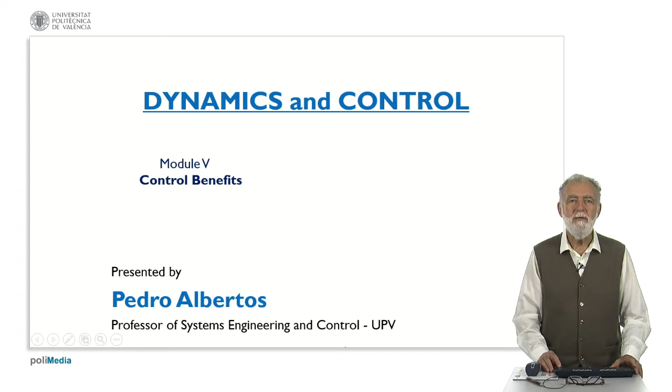My name is Pedro Albertos from the Polytechnical University of Valencia in Spain, and the subject of our session today will be about the control benefits. In particular, we are going to deal with performance improvements.

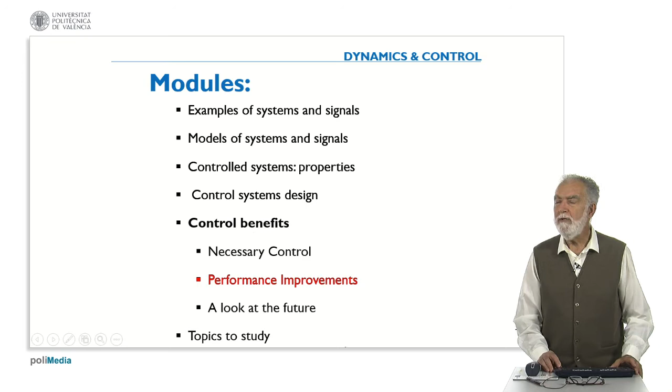You remember the modules. We are in the fifth module, control benefits. Last session we were dealing with necessary control, when the control is necessary, and today we are going to deal with the improvement of performance. Then we have used the control, as we saw before, dealing with unstable plants and also to access processes which are not locally accessible, to remote processes.

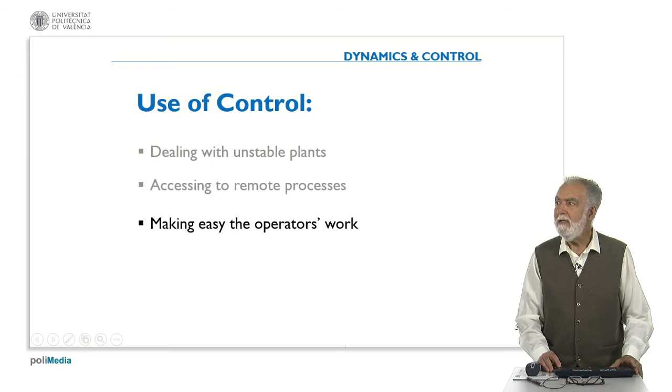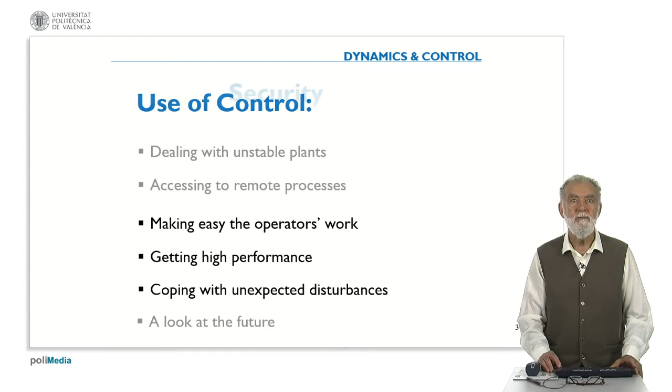And today we are going to use the control to make easy the operator's work, to get better performance, and also to cope with unexpected disturbances. And in the next session we will have a look at the future. So let's start with the security.

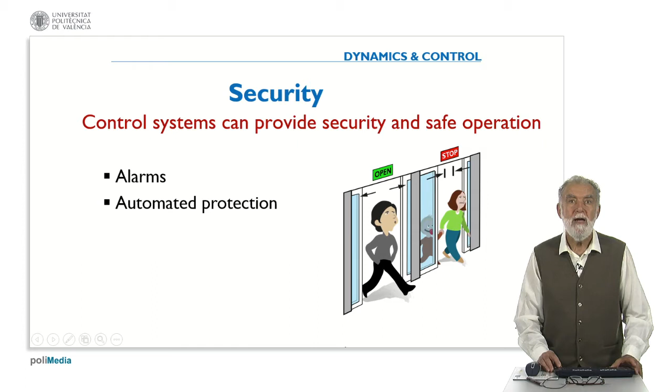We know that the control can provide security and safe operations. Remember the cartoon we have at the beginning, and there is a girl trying to go through the door. Then the control will detect that there is a person coming through and will keep the doors open. So we can use control in a very general way to deal with alarms and to provide security and safe operation of many processes. But it also provides the facility to make simple actions in harsh environments.

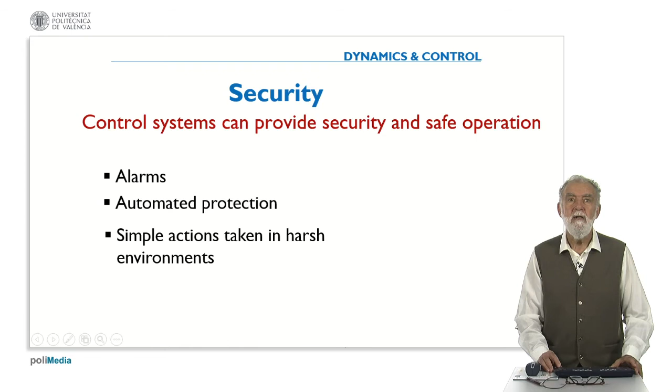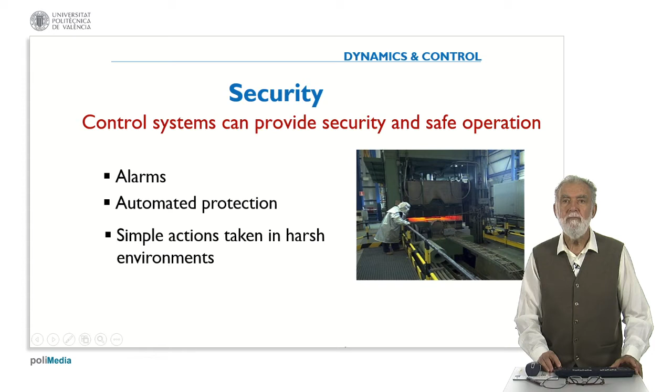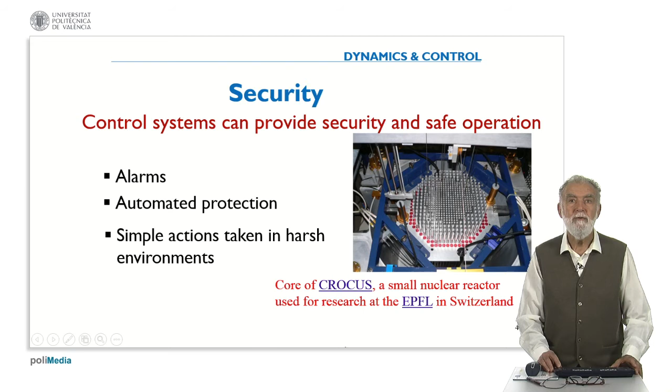For instance, if you consider here a steel making factory, the temperature is very high, the humidity also, and there is a lot of pollution, then any action taken here can be done remotely, and then control will enhance the security of the operators. Moreover, if you consider a nuclear reactor or any operation which is dangerous, any simple action can be done remotely by control, providing the facilities to change, to adapt, to modify the working conditions without the need of the operators to enter in this environment which is not very safe.

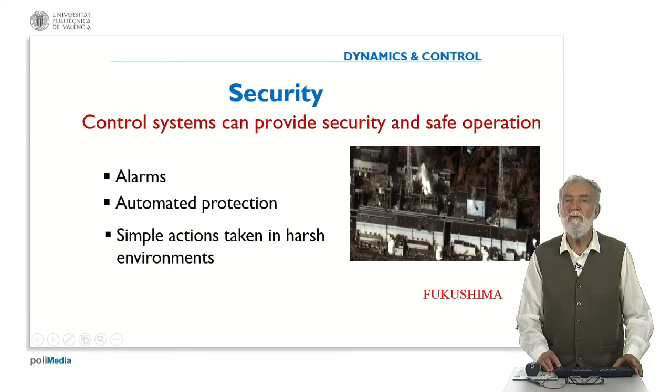Well, control can do many things, but of course cannot avoid disasters like the one we saw in Fukushima. In that case, this was not a problem of control, it was a problem of the breakdown of the power plant, and control is prepared to cope with some disturbances which are in principle already foreseen or taken in consideration when you design the control, but not for any kind of disturbances.

We can use the control also for commodity, for quality of life. Remember in domotics we had this house of the future, and we came from a central control to control the lights, the security, the alarms, the opening and closing of the windows, the heating, or even the irrigation. And this can be done locally in the central control or remotely by the phone. And even if you don't know, there are many control loops, a lot of information coming in and going through to improve the commodity of your house.

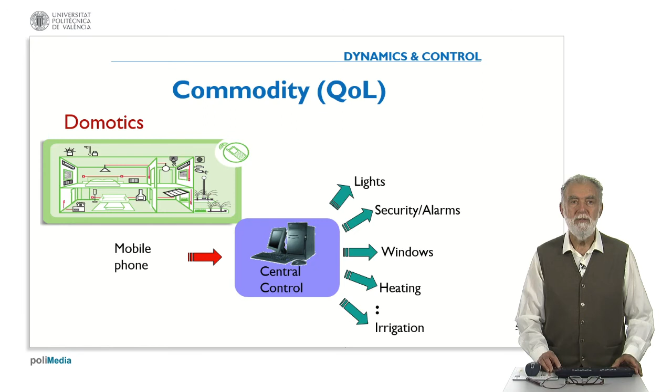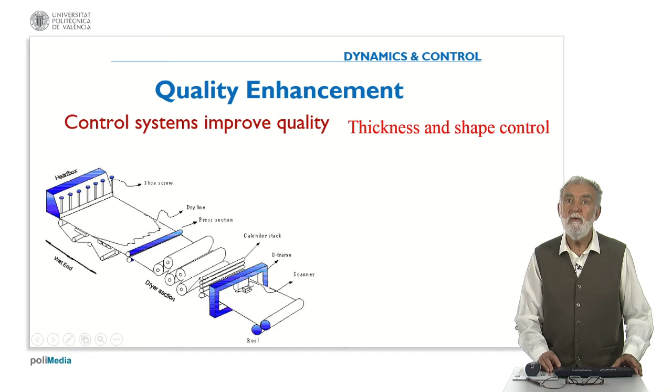It can be also used for quality enhancement. If you consider, for instance, the paper machine that we have seen in one example, and you want to control the thickness and the shape, that means that you must use the control to get at the end a web of paper which is of good quality with regular thickness and regular shape. The same if we are dealing with a hot mill for steel strip making, and this also involves saving the wasting of material and of course saving energy consumption.

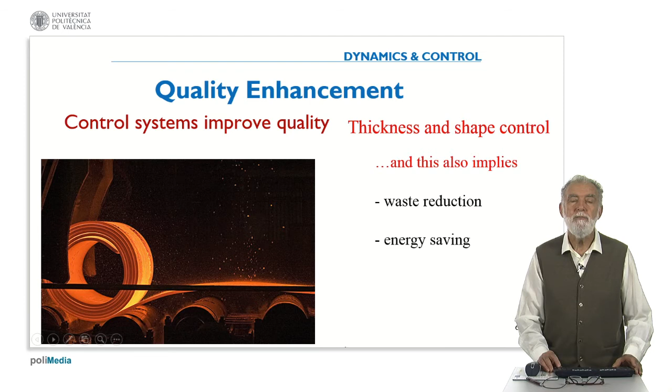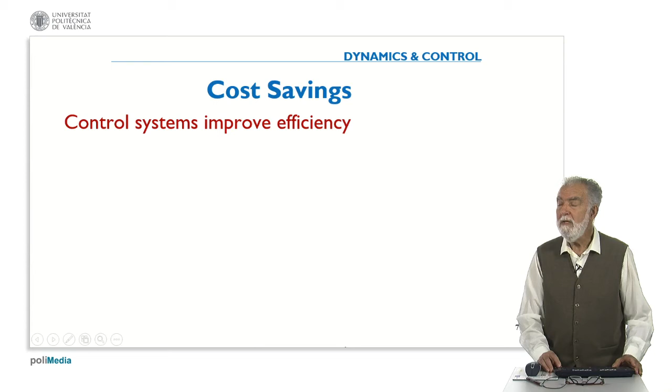So not only are you getting better quality, but also you are avoiding wasting some of the material and, by the way, also the energy used to produce this waste material. But we can use also control to save some costs. For instance, in the same system, we can improve the efficiency about the humidity of the paper. Assume that you need to produce a paper with a given level of humidity.

Then, if the control is not very good, like you can see here, the humidity is changing with the time. If the maximum humidity of the paper is defined by this line, then you should keep below this line. Otherwise, the paper will be too humid and not good to be sold. Then you need to put the reference of the regulation of the humidity at this level.

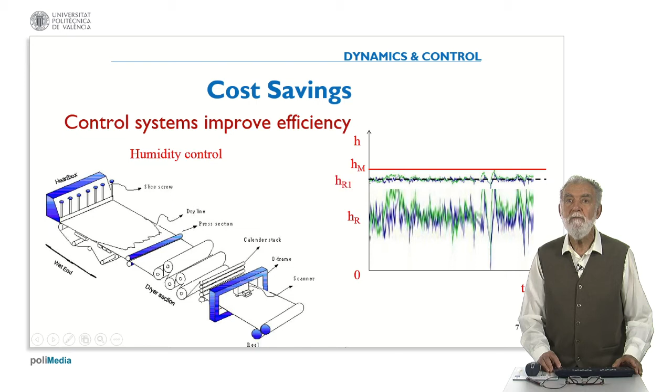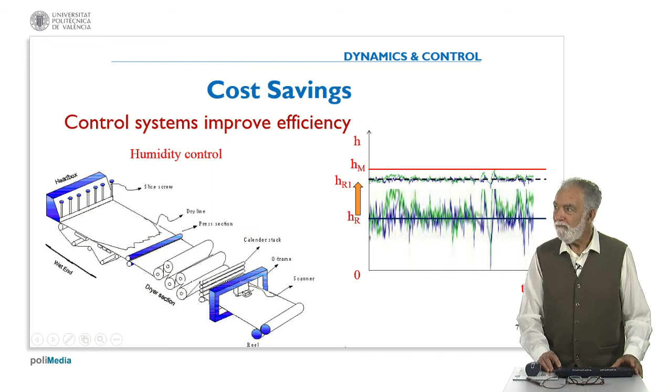But if the control is much better, and you can reduce the oscillations of the humidity, that means that you can put up the humidity reference. And that means that there is a difference between the previous reference and the new one. And all this is humidity that you are not taking off of the paper, so you are not using much power. And you can say also that you are selling water as paper, which in that case is improving the efficiency.

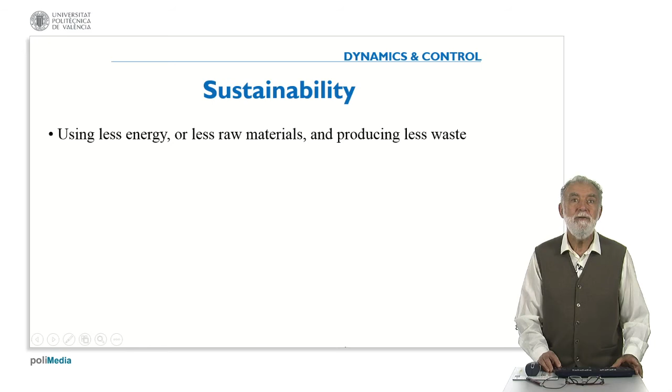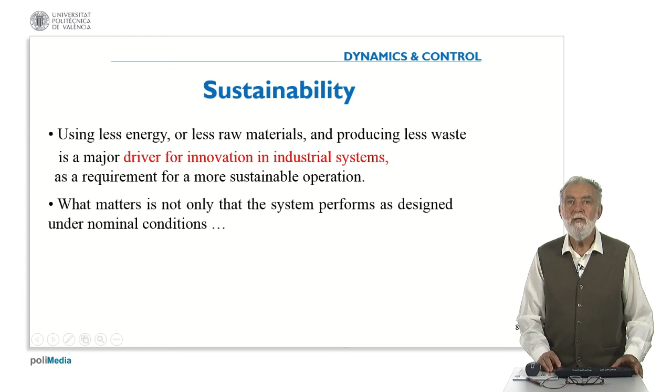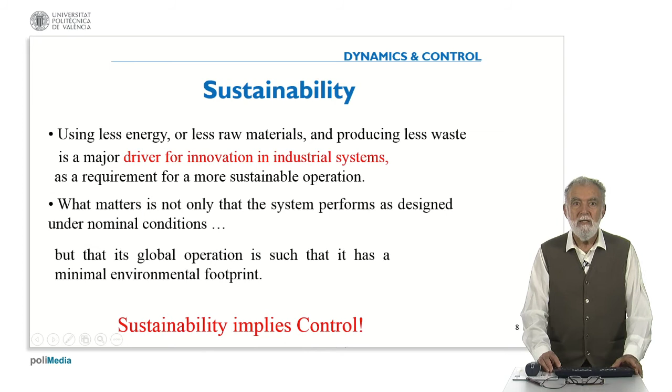Sustainability. Well, using less energy, using less raw materials, and producing less waste is a major driver for innovation in industrial systems. And this is a requirement for a more sustainable operation. What matters is not only that the system performs as designed under nominal conditions. It should perform well, so that the global operation has a minimal environmental footprint. So sustainability implies the use of control.

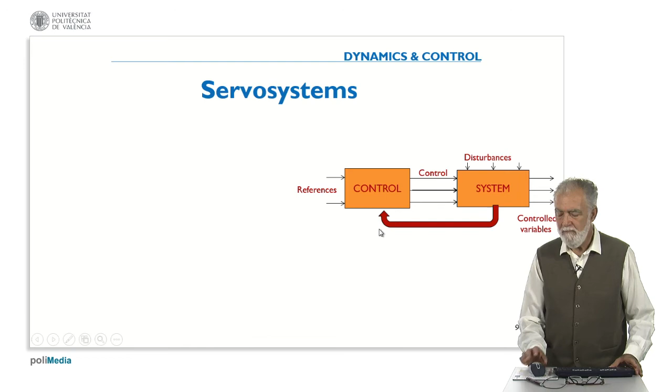Let's go back now. We have seen some examples of logical control in security and alarms, and we have seen some regulation properties. Let's see now the use of so-called servo systems. You remember that in a servo system, like the one in the picture here, you have some references, and in general you want the controlled variables to follow these references. And you remember the copying and reproducing example that we saw in the previous session, with miniaturizing or enlarging a given activity of the human.

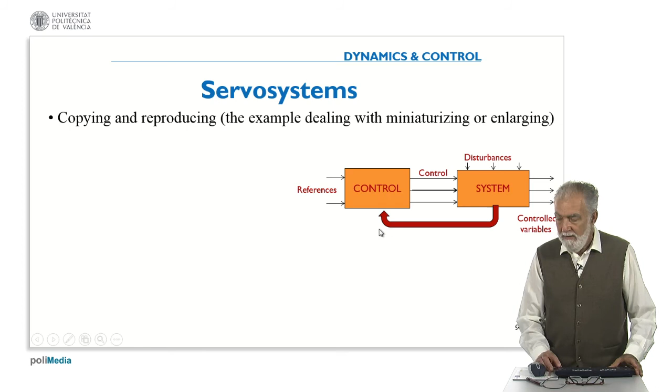Then let's now consider the case of a car, where we are using power amplifying. There are many automatic systems in the car. The servo driving, which is the power assisted steering. You are moving the steering wheel with very little power, and then you are moving the wheels of the car in the way you want. This is a servo driving or servo steering system.

The same for the brake. When you are trying to brake the car, you are not, like in the old horse vehicles, braking the wheel directly. You are sending a signal about how much brake you want to apply, and then the servo system will apply the power which is required. But you also have some other systems for security, the anti-lock braking system. Or you may also have cruise control, or stability improvement to avoid skidding on the road when you are taking a curve.

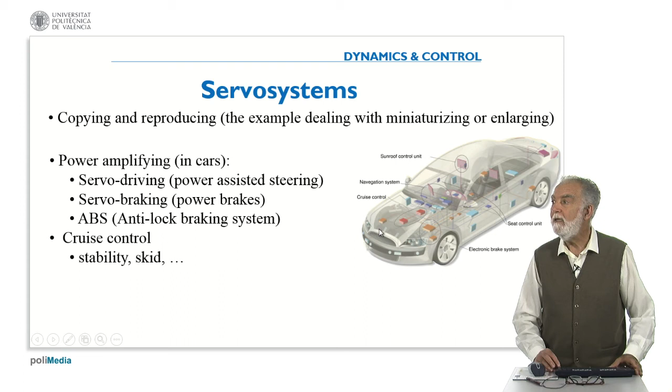Well, this is for cars, but also if we consider the use of robotics in assembly lines, in this case it's also for a car, but it could be for any other equipment. Then you have the painting, the welding, the assembling, the checking. All this can be done very precisely by use of control systems, which define previously what the tool is required to do, either for painting, cutting, welding, or whatever, and then the system reproduces it precisely and with much more power.

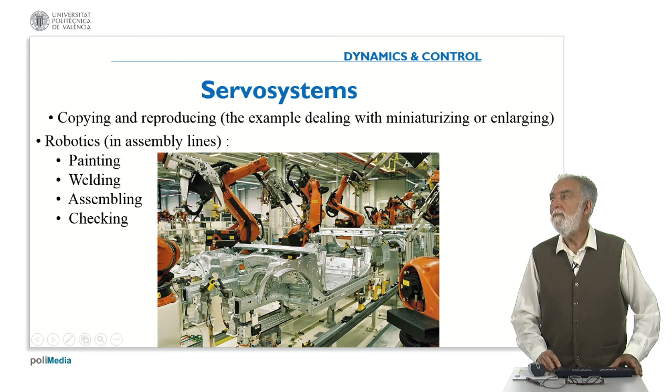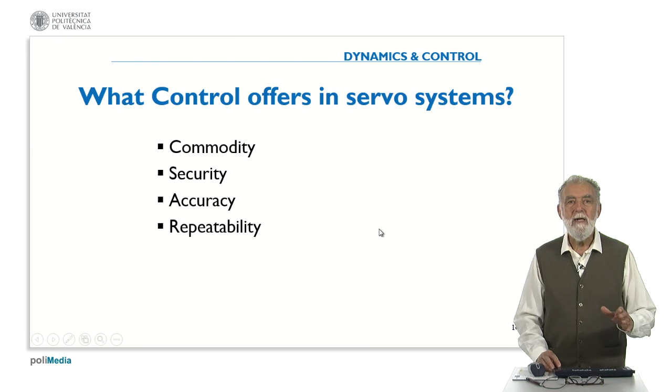So what does control offer in servo systems? First, commodity, because you don't need to go locally and with much energy. Security, because you can be far away, not in the harsh environment. Accuracy, because it is a matter of the selection of the sensors and the actuators. You can have repeatability, because once you have defined what to do to paint or to cut, this can be done several thousands of times without error, and in general you can get savings.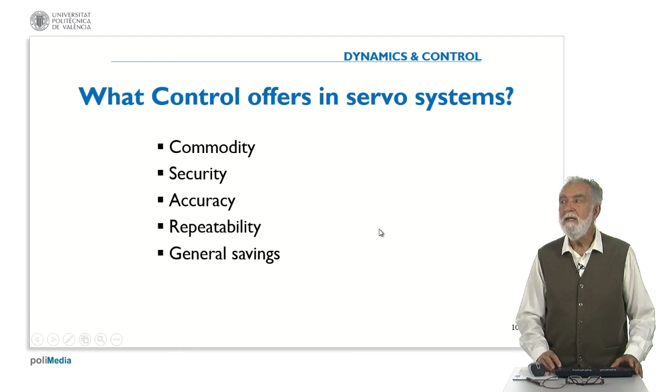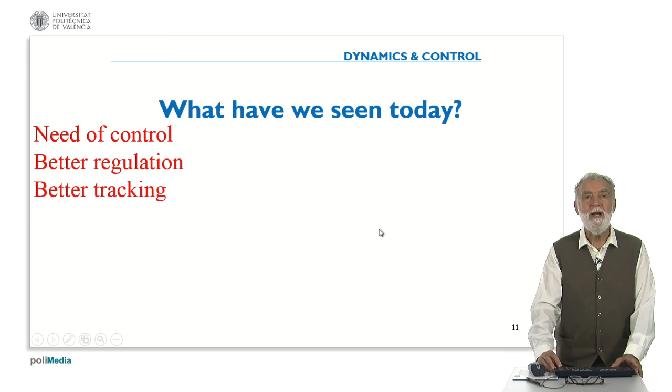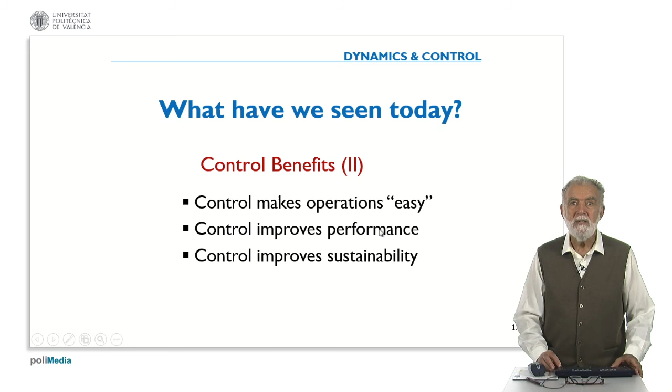So what have we seen today? We have seen the need for control in many applications, but we have also seen that we can get better regulation and better tracking. So we have seen some benefits of control. In particular, we have seen that control makes operations easy. Control improves performance. Control improves sustainability, achieves savings, and provides a better quality of life.

Well, at this point, it would be good to remind you that control can achieve all these benefits, but it's also something that we must take with a lot of care, because a control which is not well defined, not well designed, can just get the opposite results. So control is a challenging activity, trying to get all these benefits.

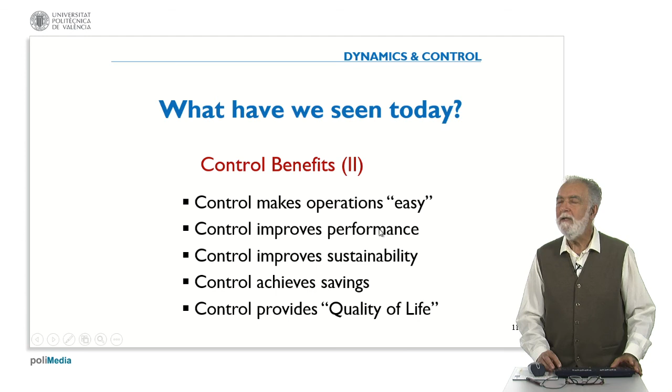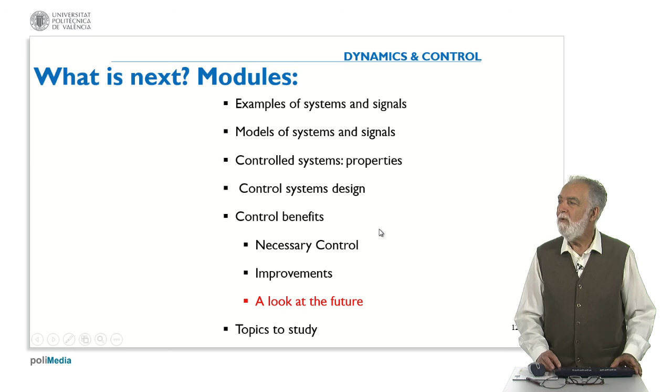So what is next in our course? Well, if you look at the modules, looking again at the control benefits, in the next session we will have a look at the future, in the sense of what control can provide us to achieve new goals, to achieve new applications. So we will have a look at the future in the next session.